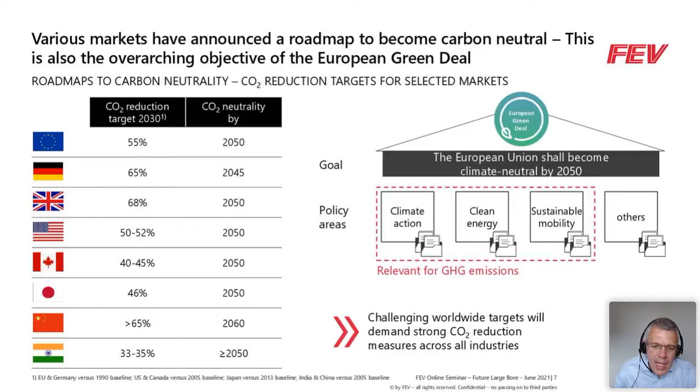And due to that fact, several initiatives have already been started to address these CO2 reduction challenges. For example, in marine we have the IMO greenhouse gas reduction targets, minus 50% until 2050, and to become CO2 neutral latest by 2100. There is also the so-called Getting to Zero coalition, which is targeting commercially viable deep sea vessels with zero CO2 fuels by 2030. So an additional driver for defossilization in the marine sector.

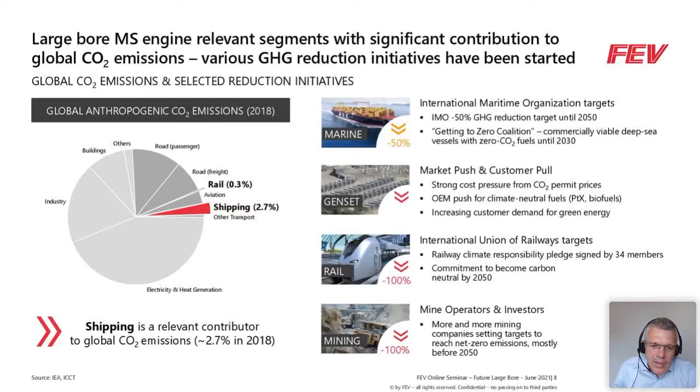Let's have a closer look at shipping first. Looking at regulations already defined in the marine sector, on the one hand we have the emission regulations, the IMO regulation for worldwide shipping. We also have local regulations in force, like the European Stage 5 regulation or the Tier 4 regulation in the US market. In addition, to address CO2 emissions, various measures are already being enforced. We have the so-called Energy Efficiency Design Index, which defines targets for the CO2 emitted per unit of transport work, and which in particular addresses the fuel consumption of main but also auxiliary engines.

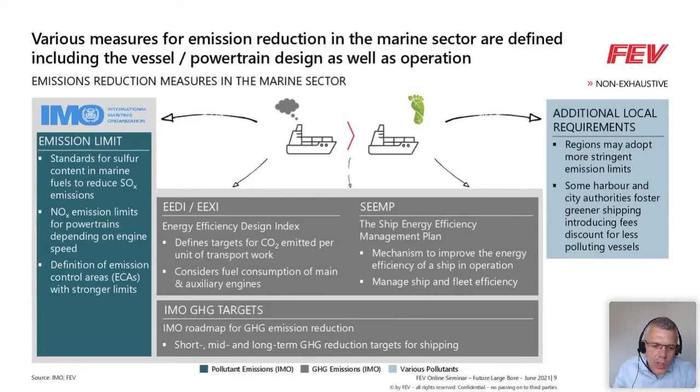In addition, we have the Ship Energy Efficiency Management Plan, which mainly addresses the operation of vessels on the ocean, so fleet efficiency and the management of the ships. And as already mentioned, we also have short, mid, and long-term greenhouse gas reduction targets defined by the IMO. In addition, what we have to assume will become more and more relevant in the future is additional local requirements: specific markets, maybe even specific city areas, defining targets with regard to CO2 emissions in order to fulfill their individual CO2 reduction targets.

So what does that look like on the timeline? In the first step, starting here with the EEDI and SEEMP regulation. This regulation has already been in force for some time, and the next phases are also already defined.

And in addition to that, we also have the IMO CO2 reduction targets, as mentioned before, with the target minus 50% global greenhouse gas emissions from shipping until 2050, and 2100 at the latest also to be greenhouse gas neutral.

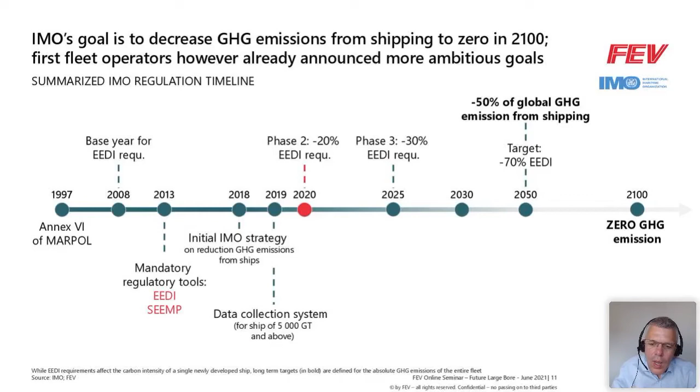And very important, and we will come back to that later on in the presentation, this is not related to new vessels being launched into the market. This is related to the entire fleet being operated on the oceans. What is also important is that the baseline here is the 2010 greenhouse gas emissions. So any further increase of marine transport will also be directly related to an additional challenge in order to achieve these greenhouse gas reduction targets.

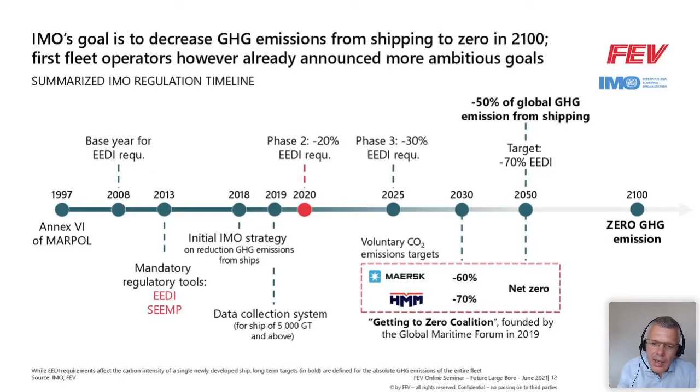And in addition to that, as already mentioned on one of the previous slides, we also have voluntary targets, like the Getting to Zero Coalition. So that means large fleet operators, which also defined targets which are even more ambitious compared to the targets defined by IMO.

This slide, on the left-hand side, shows a projection of the global shipping demand, and this is related to the aspect I mentioned before. With regard to global shipping, the assumption is that there will be a significant increase in transport in the marine sector, ton kilometers by shipping, and this adds significant additional challenge to the CO2 reduction targets. As mentioned before, the baseline for the IMO greenhouse gas regulation is 2010, and the reduction targets are defined based on the 2010 CO2 emissions from the marine sector.

And on the right-hand side, this shows an estimate of what can be achieved with the already defined EEDI and SEEMP measures. And if we relate that to the 50% greenhouse gas reduction target in 2050, the key message is there's a huge gap remaining. A huge gap of about 70% of the greenhouse gas reduction which needs to be achieved, where we need additional measures in order to comply. So new technologies, in particular including alternative fuels, most probably will be needed to achieve these challenging CO2 reduction targets.

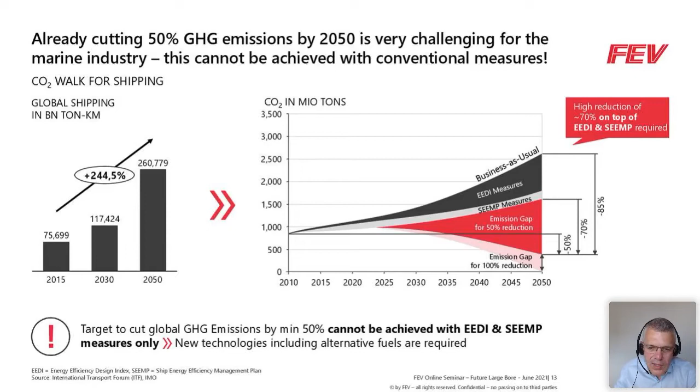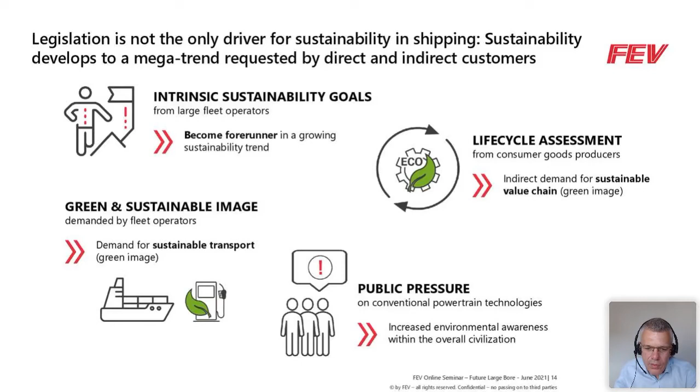But, and I think this is quite important, it's not just the regulation which is pushing for low CO2, low greenhouse gas solutions in the future. There are additional drivers. On the one hand, green sustainability targets by the customers, the big fleet operators, which in the future will more and more ask for that. It's also the public pressure on CO2 and greenhouse gas reduction in the transport sector. And also the life cycle assessment for consumer goods, which puts quite a lot of pressure on an overall sustainable value chain, including transport in the marine sector.

So what are possible solutions to address these challenges? I think here we have quite a huge spread of technology options available to further improve medium speed engine powertrains in the future with regard to CO2, but also pollutant emissions. We have engine optimization, hybridization, different alternative fuel options, battery electric solutions, fuel cell solutions, and so on.

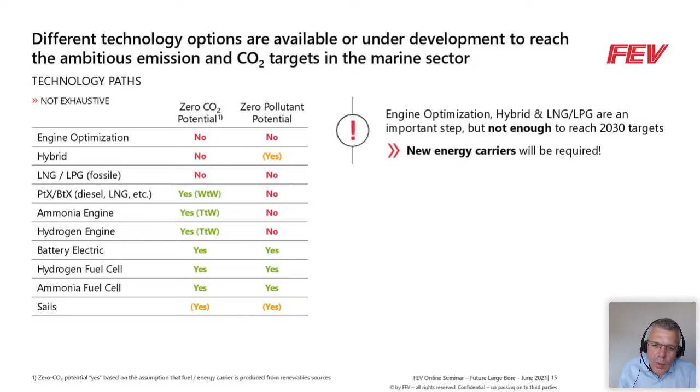Not going into all of the details with regard to CO2 reduction potential, but also the potential to reduce pollutant emissions or even achieve zero CO2 or zero pollutant powertrains, there are some differences between the individual solutions. One of the key messages here: purely with engine optimization, with hybridization, and also considering fossil LNG and LPG, most probably it will not be possible to achieve the future greenhouse gas reduction targets. So we will require new energy carriers to do that.

And this is directly related to further questions, further challenges. What about infrastructure? What about the energy storage on board? What about a joint fuel strategy? And what about the costs related to alternative new energy carrier solutions?

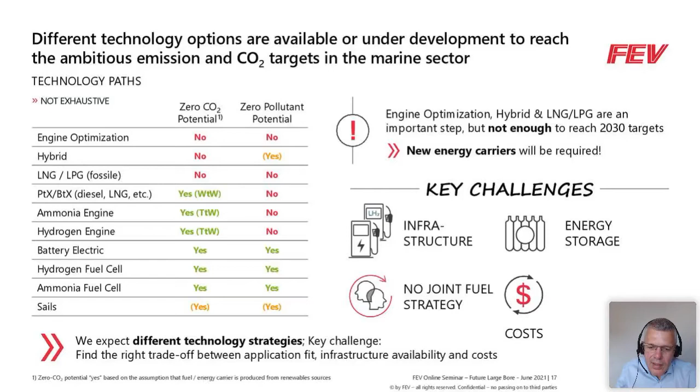And one key message here, and we will address that in a bit more detail in the following slides: most probably there will not be one and only strategy. There will be different technology strategies needed depending on the individual application type, maybe also depending on individual markets, taking the right application fit, the infrastructure availability, and also cost aspects into account.

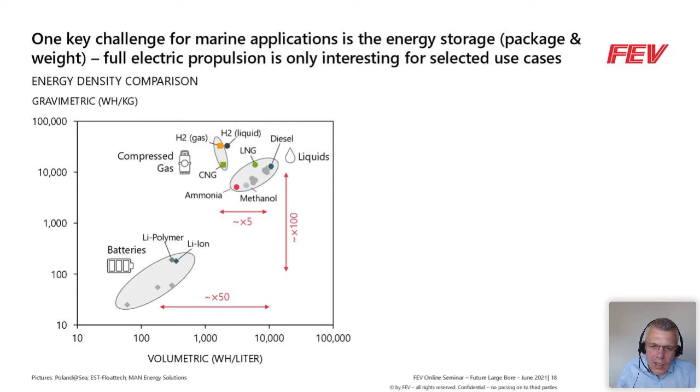So what does that mean? That also probably means that full electric solutions cannot be the one and only solution, especially also if we consider applications which are typical for a medium speed engine application. Yes, there will be some selected use cases which are also really favored for battery electric solutions, and where we also see a lot of developments ongoing at the moment. Like for example, the ferries with quite predictable routes, super yacht applications, or also a tugboat, where also a hybridization from an operation point perspective makes quite a lot of sense.

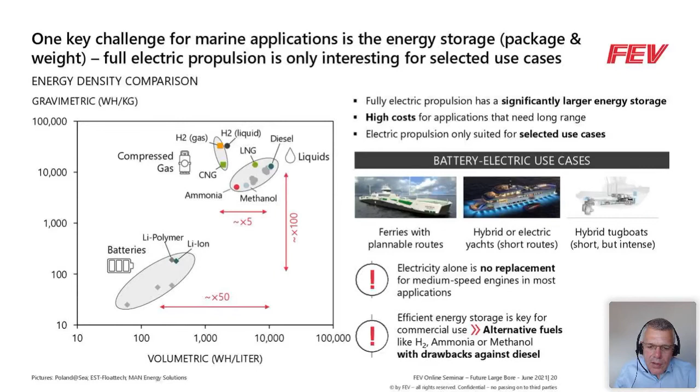On the other hand, also here with that slide, I think this is underlining, electricity alone for the applications which are typical for a medium speed engine probably will not be the one and only solution, or the solution just to a limited extent. So also here, the message: we need alternative fuel options. And if we talk about medium speed engines, especially also the liquid fuels, ammonia, also methanol, are becoming quite interesting.

So we talked quite a lot about marine. With that slide here, also just saying, of course, it's not just the marine sector. Also other industries which are relevant for large bore engines, which are relevant for medium speed engines, they also have according pressure to reduce CO2 emissions. It's generator sets, being used for peak shaving, also in combination with regenerative power, which will also in the future demand low CO2, zero CO2 options. Also the data centers, with a lot of pressure to become more green, to reduce their CO2 emission footprint, and also power supplies in remote areas. Also in the future, greener, low CO2 solutions will be required.

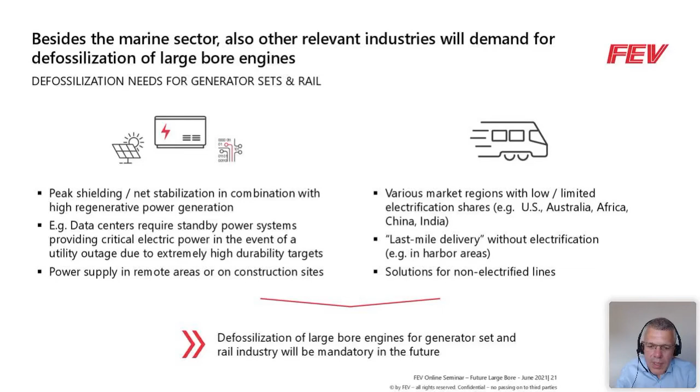And then last but not least, with the following two slides, it will already be a bit the transition to the next presentation, going a bit more into details with regards to alternative fuel options. So what are the cons, what are the pros for the different fuel options here? And also here, not going into the detail, with the slide on the left-hand side, I think it becomes quite obvious if we consider different alternative fuel options, there are some specific pros and cons. So LNG, LPG has some distinct benefits when it comes to the infrastructure, and also when it comes to the cost perspective, the costs to be invested for the storage or also the powertrain itself.

Whereas ammonia and also hydrogen as alternative fuel options have other benefits with regard to sustainability, with regard to their greenhouse gas reduction potential, with regard to local emission potential, but with drawbacks with regard to other perspectives. And now also again, very, very important, in order to conclude here that most probably there will not be the one and only solution.

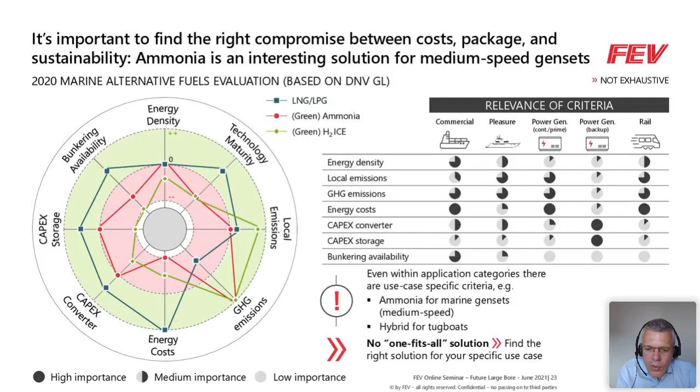If on the other hand, we have a look at the relevance of the different criteria, these different assessment criteria for the different application types, here we also have some distinct differences. So the relevance with regards to, for example, the storage density, the energy density of a fuel, this is different if we consider a marine application or if we consider a generator set application. So again, the message here: no one-fits-all solution. You need to find the right solution for your specific use case.

And this typically includes the question, what about sustainability? What about environmental friendliness, greenhouse gas emissions, also other pollutant emissions? What about the infrastructure? What about storage, onboard storage for all the different fuel options? And also, of course, very important for all the commercial applications: what about costs? The cost for the technology, the cost for the storage, the cost for the fuel itself.